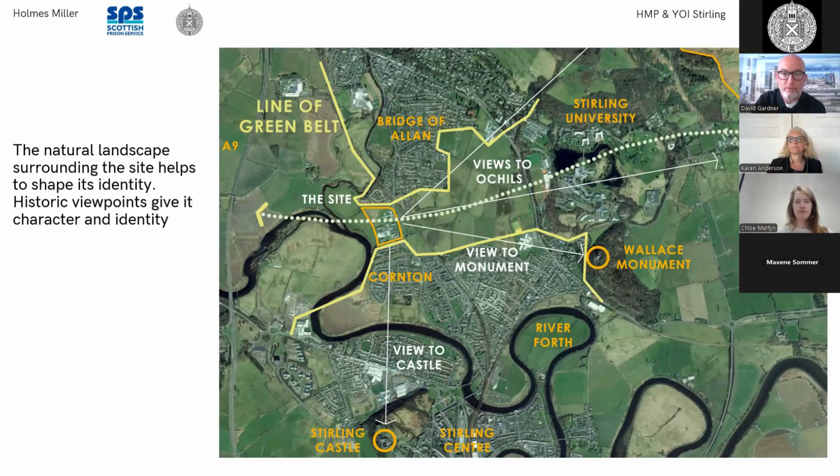I won't dwell on this slide. Everybody knows where Stirling is, in central Scotland, just north of Glasgow and Edinburgh. The site itself sits to the north of Stirling city centre, between Cornton and Bridge of Allan. It's a fantastic site with spectacular views to the surrounding natural and historic landscape. It sits in the middle of a green belt that runs west to east, which was a starting point for us in terms of how we tie the scheme into the natural landscape. You can see how fantastic the natural and historic environment is from that photograph.

The existing prison, built predominantly in the 60s although it grew over time, is a collection of fairly institutional corridor-based wings of accommodation. Fairly uninspiring, I would say. When you were on the site, you had no real sense of an overall master plan, no sense of being in such a fantastic context. The existing prison buildings were fairly, I guess, not fit for purpose. They were institutional and a little bit dead on their feet, with no joy, character, or purpose to them.

Have I lost the screen? No, I've lost my PowerPoint. No, we can still see it. Hold on. Sorry, apologies for this, I've just got a blank RIAS logo in the middle now. We can currently still see all your slides, like in a row. Okay, right, okay, I think I'm back now.

Sorry about that. So this report looked at both the statistics around the women in Cornton Vale and also the inadequate quality of Cornton Vale, which I mentioned was not fit for purpose. Things like high levels of self-harm and a lack of constructive and meaningful activity were influenced by the design of the existing establishment. A set of recommendations came out of that report, the main one being that Cornton Vale should be replaced with a purpose-built, trauma-informed new establishment very much focused on female offenders, so it was gender specific in that regard.

This is where SPS and Ian Smith came in quite heavily at a very early stage. There were a lot of exercises involving the user groups, including the governor, deputy governor, and the management team within the existing Cornton Vale. It was a bit of a get-out-of-your-comfort-zone learning experience, trying to push some alternative thinking around what a prison should be.

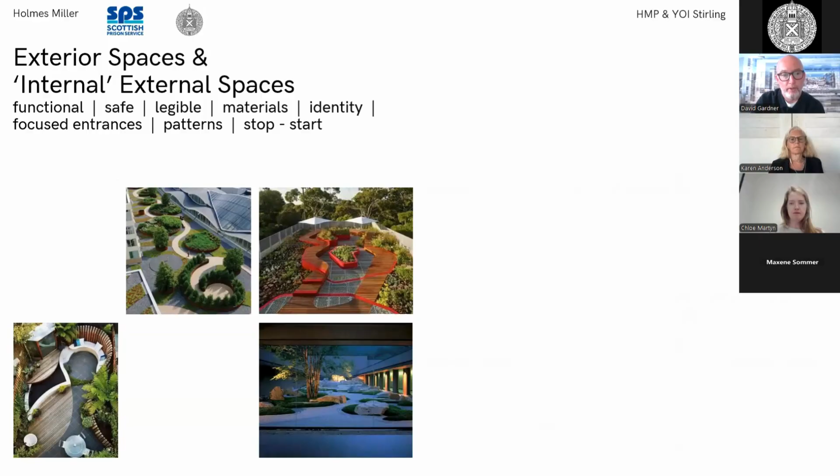And then again, just starting to think about how landscape can be woven into the overall concept as well, whether that's daylight, context, and external spaces and relationships from inside to outside spaces.

We didn't really look at any local or national exemplars because I think our strategy was that there really aren't any of any merit.

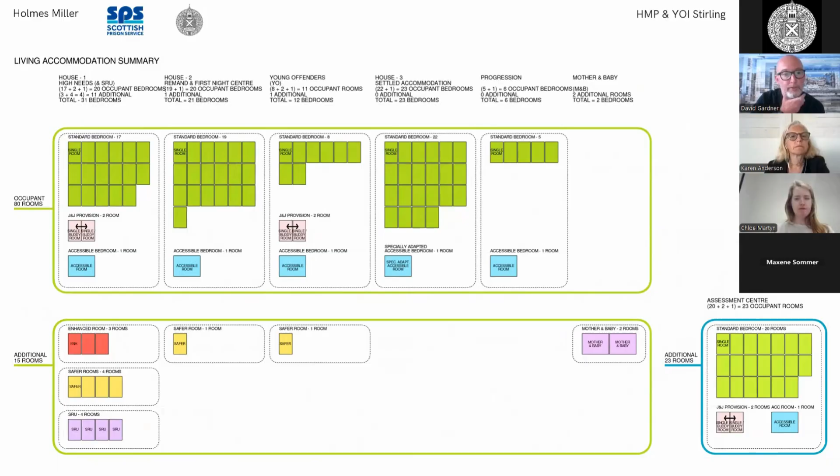So in terms of the design process, most projects start off with fairly complex schedules of accommodation. This was no different. We had a series of individual houses that had to accommodate a number of bedroom spaces, and these were all broken down into particular needs and requirements, whether that be remand or high needs or settled accommodation or young offenders. And there was also a requirement for an assessment centre, which was an additional house block.

So there's a bit of a strategy starting early on to try and understand the appropriate numbers of bedrooms to put within each community, to allow an understanding of what's the optimum number of women that should be socialising within an individual community.

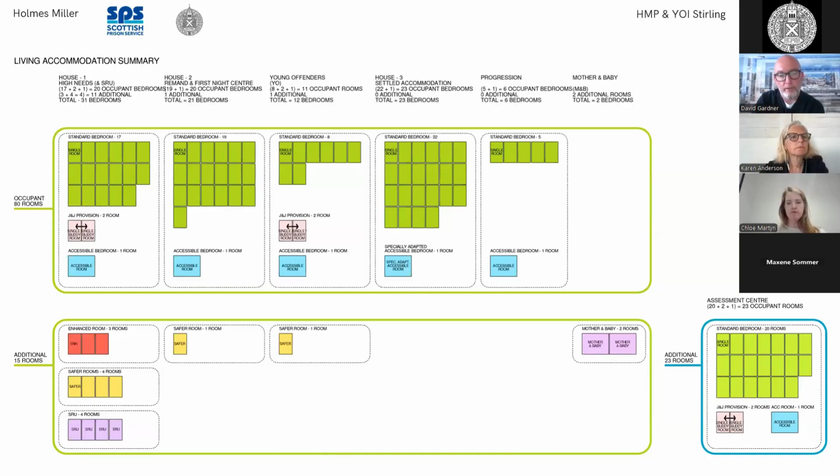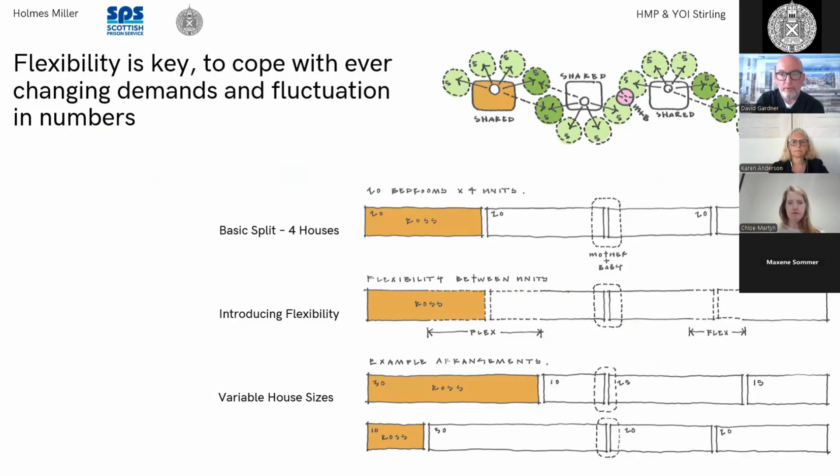That then led on to some abstract diagrams around flexibility - trying to create house designs that allow an element of flex, so that if particular types of accommodation require higher numbers, there can be a flexibility between the spaces to expand and contract from one wing to another. And then we started to look at different types of arrangements of bedrooms, with a particular focus on how they relate to landscape spaces.

So obviously there you can see we started to look at courtyards. We looked at radial blocks and folded blocks and how they relate to circulation spaces and obviously to the landscape itself.

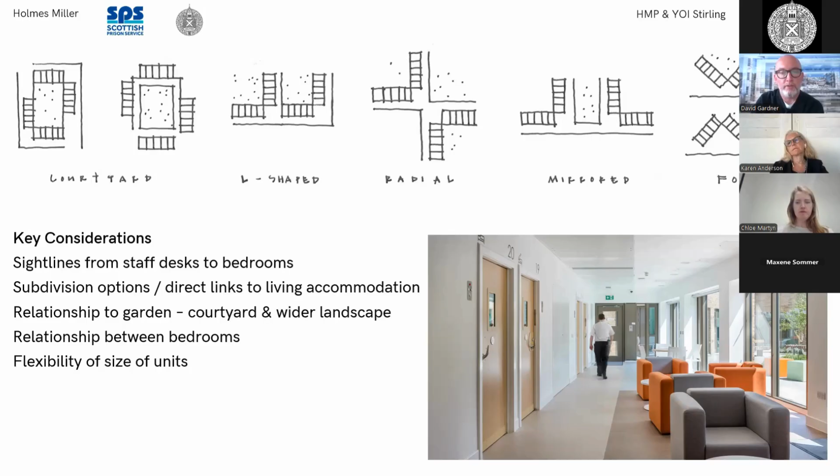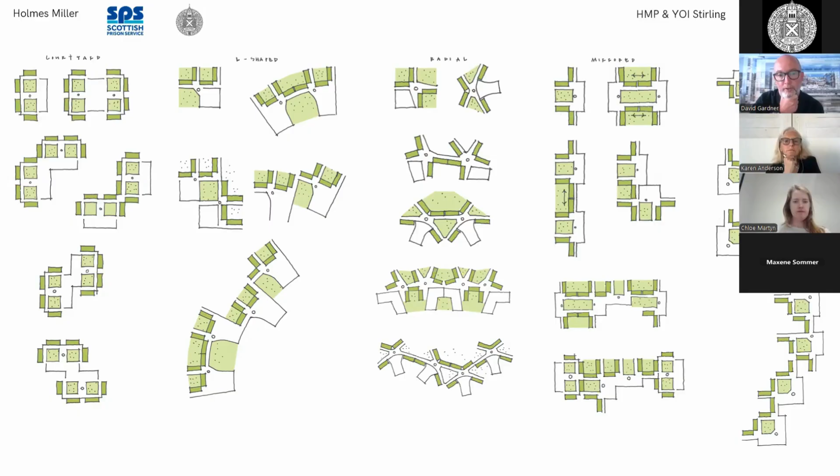And then we looked at these an awful lot. This is just a snapshot of some of the diagrams that we pulled together just to try and understand how these sets of accommodation could be assembled into an overall strategy for the house wings themselves.

At the same time, all of the other accommodation on the site - this is an exercise that we traditionally go through with SPS around adjacencies. There's quite significant functional and operational requirements that have to be considered at the same time. So we strip these back down into bubble diagrams just to ensure that we get all the adjacencies correct and the security separation correct, but without trying to influence them into the shape of a building too much.

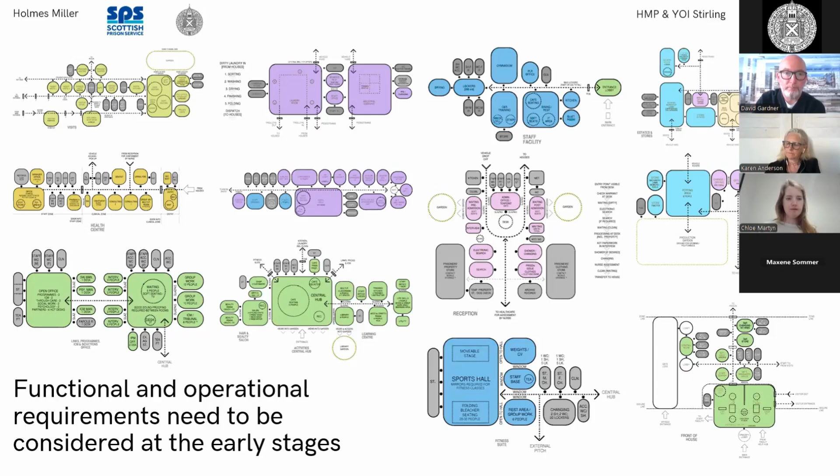At this point, we started again to think about context and particularly the natural environment. With SPS, we came up with the idea that the site is very much part of a kind of landscape flow, going from the Ochils down into the Forth Valley and through the site over the River Forth and westward. So with our landscape architect, we started to look at how that journey can be experienced through a series of different types of landscape spaces. We can talk you through those in more detail as we go through the slides.

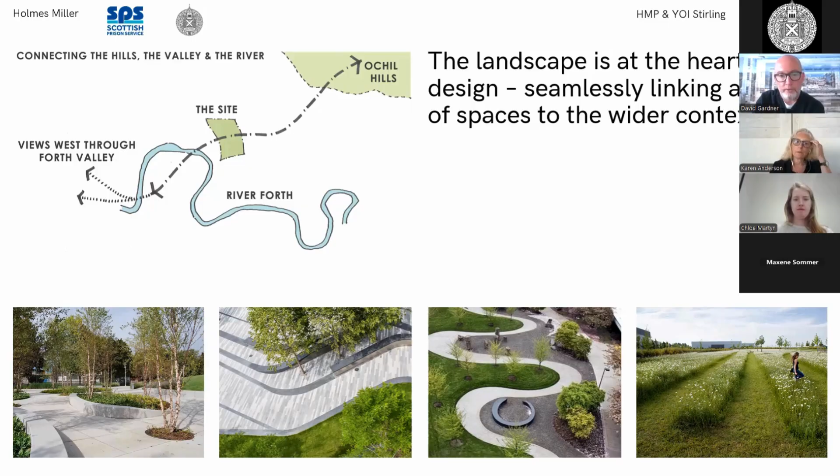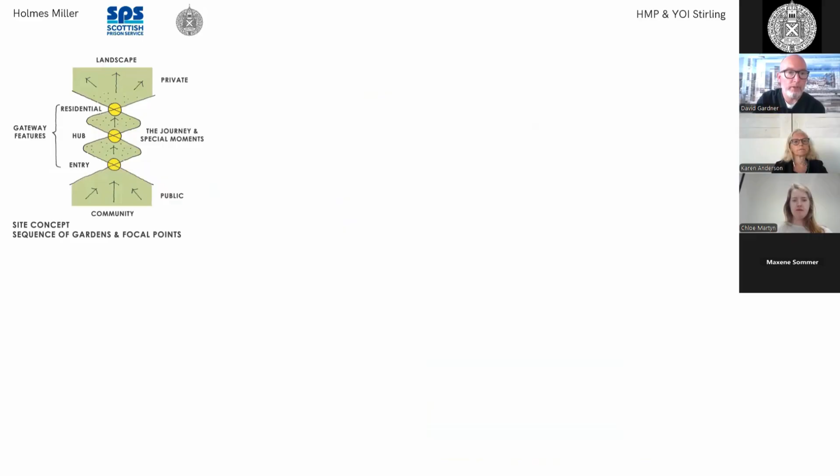So this idea where we've effectively got a flow through the site, from a community or public front-of-house side through to a private side with the bedrooms looking out into the landscape beyond to the west. We started to look at how that manifests itself on the site, east being the public side and west being the private side.

At that point, there was a decision made that all of the house buildings should be single story, single aspect, to allow an equality of experience for all of the bedrooms looking out to the west into the landscape. Then we started to drive these ideas of different character landscape zones that worked their way through the site, so you've got this kind of flow between public, semi-private and private going from east to west.

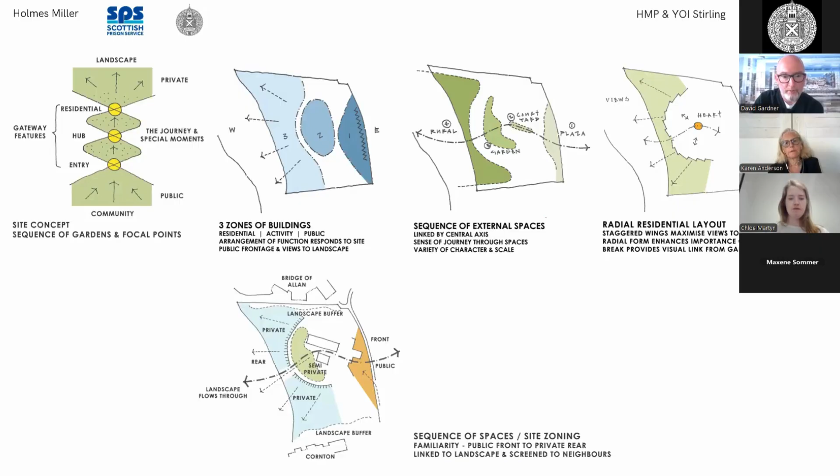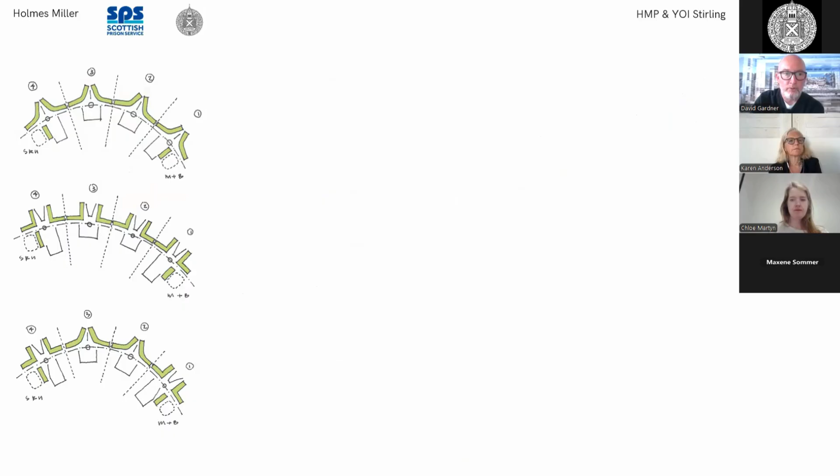So we started at that point to settle on the kind of radial form of the bedroom accommodation, still looking at lots of examples of different types of wings. Then we settled on an arrangement where we had a series of staggered, subdivided wings of bedrooms that created triangles of accommodation, which formed a kind of array around the site.

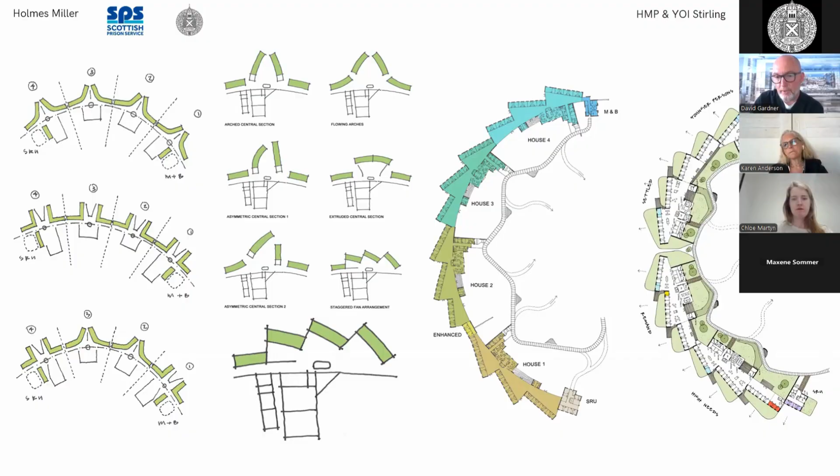What that allowed us to do was effectively angle the bedrooms towards the west, which maximised the number of bedrooms that faced west as we possibly could. That's evident from the final concept drawing, where you see we're opening these wings up as we go round. And that's an aerial photograph of the finished scheme, which again shows how that works with the wings open, broken, allowing natural light into the spaces internally.

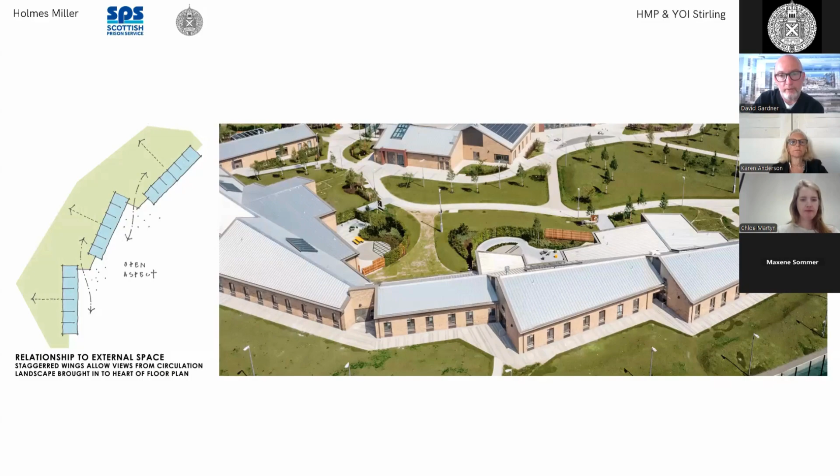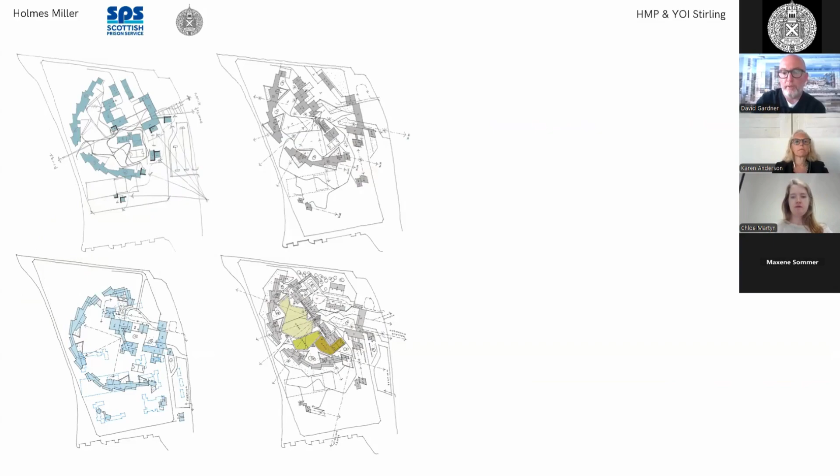At the same time, we went through a significant number of site arrangements. One of the difficulties we faced was that we had to maintain the existing Cornton Vale prison on site, to the south of the diagrams you see there. It was shrunken in size, but it still posed particular challenges. All of that in line with trying to create a master plan that picked up as much as possible from its context.

So trying to create an axis through the centre of the site which picked up on the Wallace Monument, trying to maximise views from accommodation towards the castle, and obviously trying to create the bedroom views out to the Forth Valley. That started to cement the idea of the character courtyard garden zones that wind their way through the centre of the site.

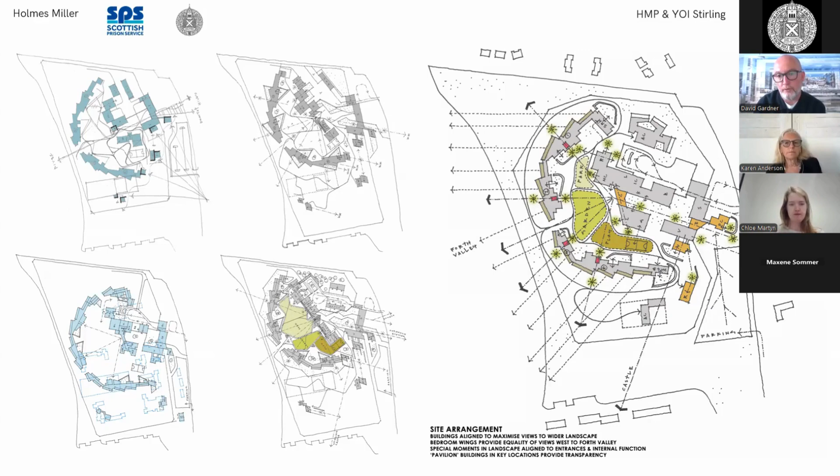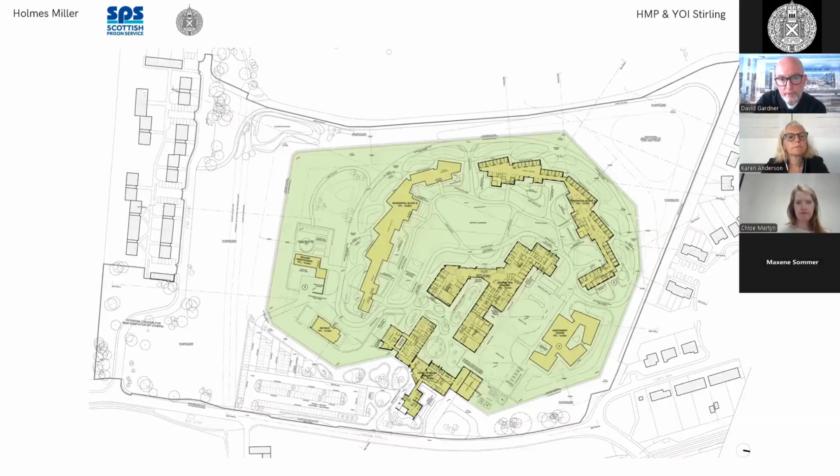This starts to touch on the second concept, which was one of transparency through the site. This is just a site layout that shows you the same arrangement.

The idea with the transparency is that this concept started off with just one of the buildings on site, the prisoner reception building, where the women will come from courts. Traditionally, prisoners arrive via secure vans and are taken into fairly solid, austere buildings and don't see daylight for probably a couple of hours going through search processes, and it's an incredibly stressful, traumatising experience.

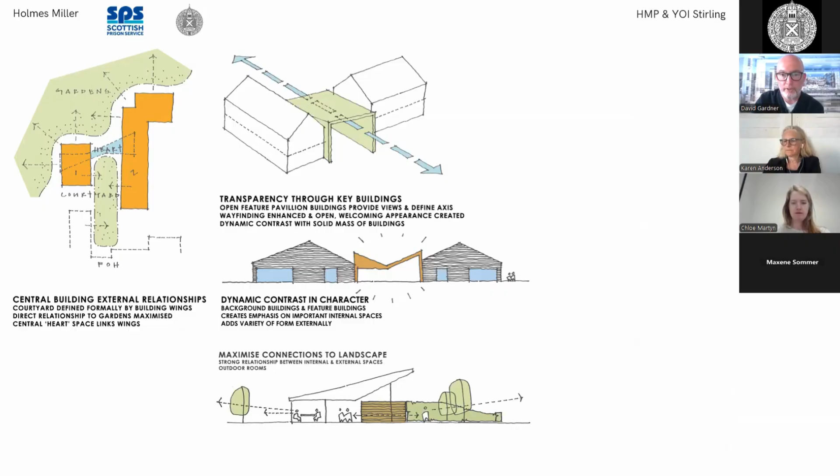The idea we tried to focus on was to create a very open experience, whereby every entrance that you went through into any building, you could simply see straight through it into the gardens. You could see the buildings beyond, so there was that transparency visually, but also an understanding of what the process is and where you're going to go. That was a de-stressing environment we tried to create. You can see again the same image, trying to create that axis so you can see straight through the site.

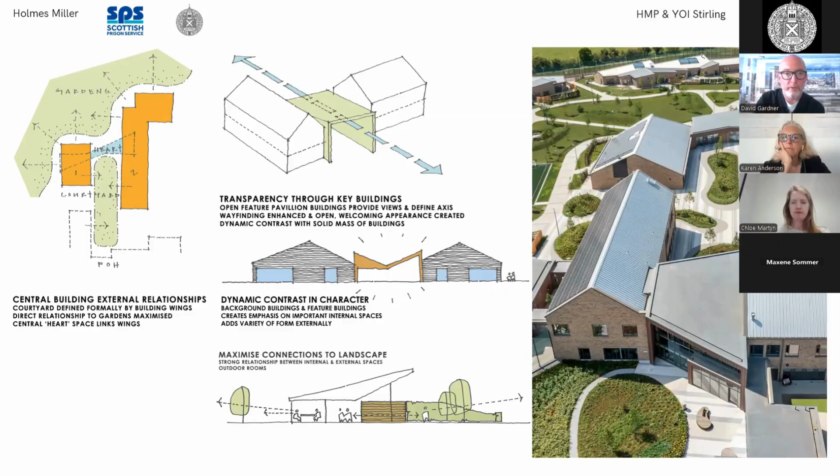This is the reception building that the women are brought into. So very light, very airy, very open, with views through to the landscape and the houses beyond. So when they arrive, they know what is in store, where they're going, what direction, and they can see the landscape beyond - that's a positive aspect.

That's just another couple of views from the same space. Traditionally, these are very, very internalized environments, full of holding rooms and search facilities with no views to the external.

As I say, what we tried to do beyond that was extend that strategy through every single building on site, whether it be the entrance pavilion you see at the top there, or even as you approach through the entry points to each of the house blocks - you can see straight through to the landscape beyond.

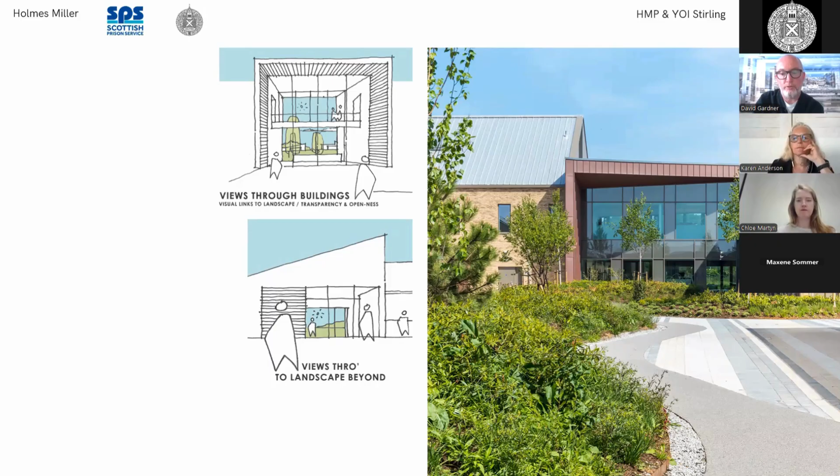This is a view from the main entrance reception. Visitors will come into this building, and again you can see straight through to the environment within the central courtyard and beyond.

Traditionally these are very enclosed institutional corridors, but what we tried to do here was create almost a separate pavilion for the visits hall, with a little garden space that both the visitors and the women in custody can access through.

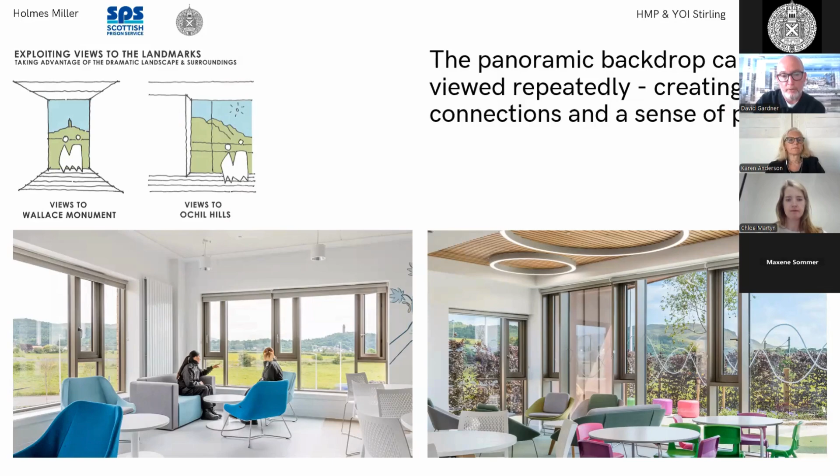Again, trying to pick up as much as possible on contextual views, whether historic monuments in the landscape or the natural environment itself, trying to create a sense of place and a sense of pride in the context.

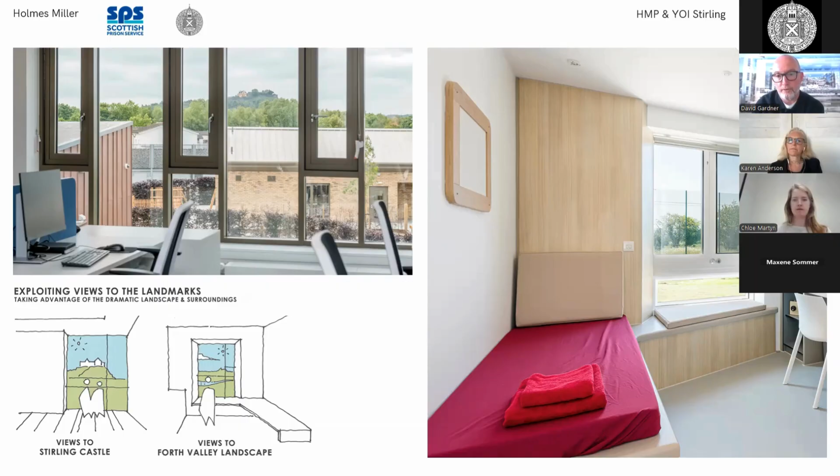I think this has been a very successful part of the project, particularly when you contrast it to the previous establishment, which was incredibly austere.

Just something as simple as putting a green coating on the secure perimeter fence really creates a different visual appearance. And the wildflower area you see there is actually within the site boundary, so it's a managed garden space outside the perimeter as well, which is quite a fantastic view through.

So coupled with the transparency strategy was making sure we had high levels of natural light and glazing, particularly around courtyard spaces. Too often courtyards, whilst well purposed, can lack a strong relationship to internal spaces, so the idea was to really maximise the amount of glazing around courtyard spaces.

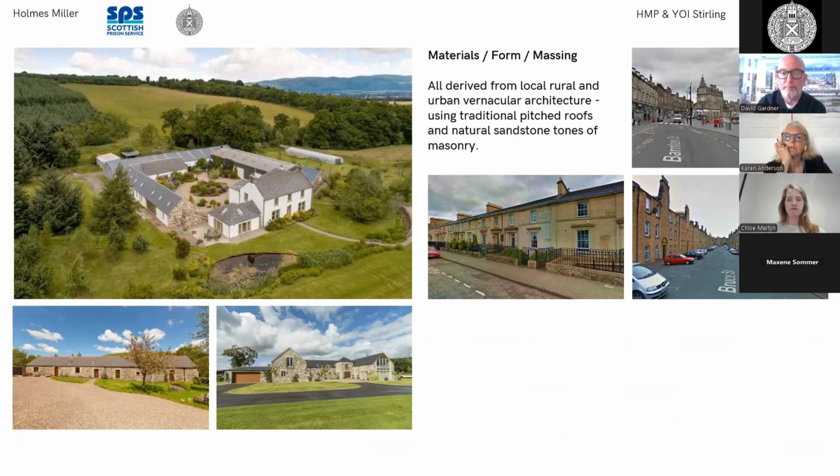In terms of materials, we tried to pick up on contextual cues around the local historic vernacular, with courtyard, single-storey farmsteads, trying to create a pitched roof rationale, and tying in material colours with the sandstone colour prevalent throughout Stirling.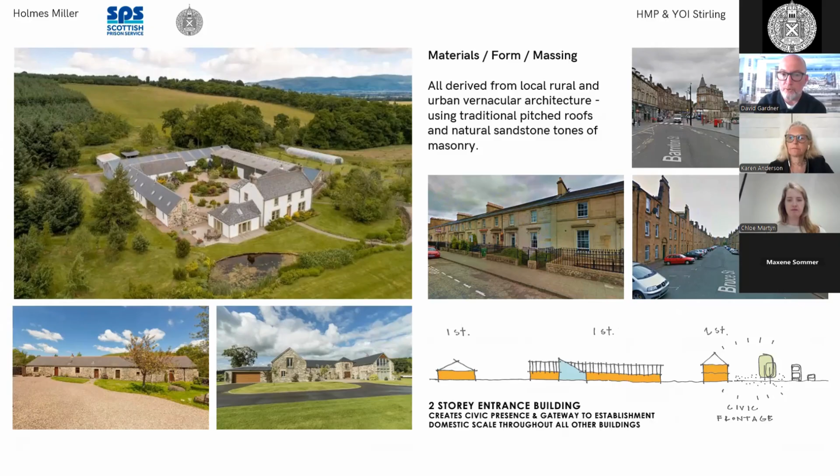That's a diagrammatic section of how we've used the massing of the front of house building, a two-storey element, to create a little bit of civic presence, and then a human scale throughout the rest of the site, which creates a hierarchy.

These are some views of the finished courtyard areas, showing the facing brick that ties in with the sandstone colours around the area, and a series of pitched roof buildings which pick up on the local character.

Some smaller views to the landscape. This shows the visit hall pavilion, which is metal clad. The idea was that a number of these metal clad pavilions created a contrast to the solid brick, and these pavilions would be heavily glazed as you went around the site.

Where we did use precast concrete, we used it with graphics, and in this instance it was to visually screen the vehicle service zone beyond, but it creates a nice backdrop to the landscape gardens.

Internally, our colour strategy and graphic strategy were heavily focused on the links to the natural landscape, starting with a kind of green spine, but also looking at the seasons and how different plant species blossom throughout the year, and the different colour cycles created throughout the year. It was a slightly abstract approach, but it set up a background palette and an accent palette that we used throughout.

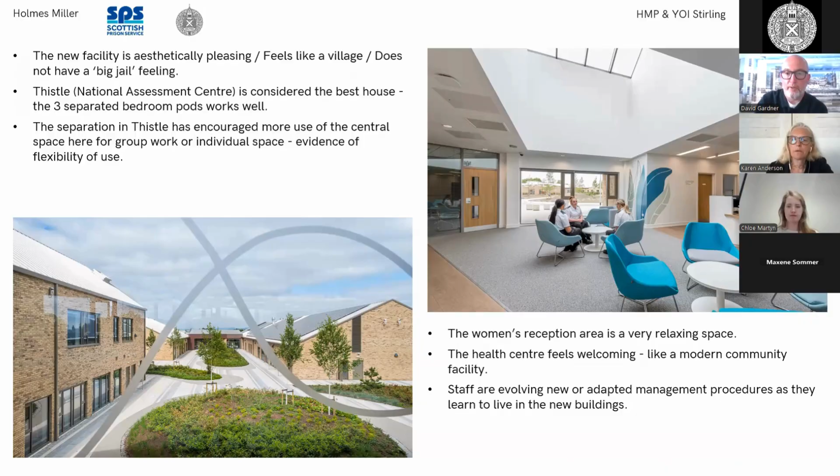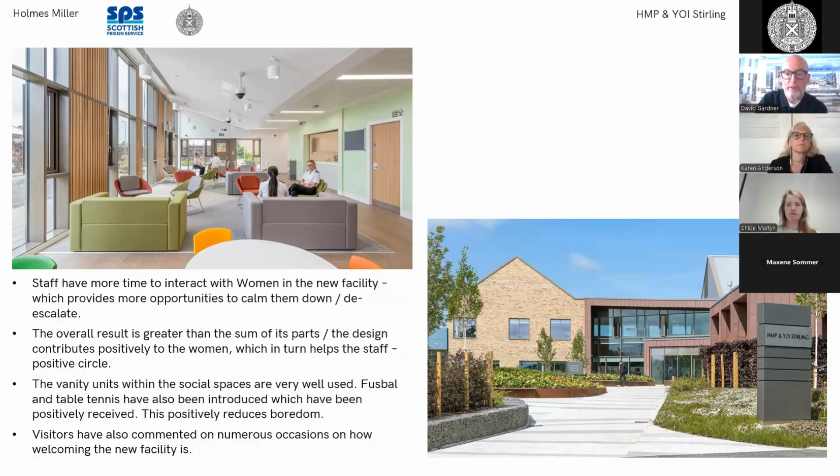These are some of the statements that came out of the post-occupancy evaluation we carried out. The overall process is still evolving, but you can see statements around how much more time staff have to interact with women in the new facility, and even down to small things like how vanity units are used, and how spaces are subdivided so people can either be in groups or retreat into more personal spaces as they feel.

You can see women on arrival have a very positive initial reaction to the reception spaces. So it's been a very worthwhile process to go through in terms of understanding how the staff and the women have benefited from this new environment.

Just on the final slide here, this was just an anecdote. There was a media company that came in to make a production on the new women's estate, and there was a particular woman in custody who I think was quite overwhelmed by how different the new establishment was, and that she was able to actually meaningfully reintegrate with other people in the new establishment. So it's things like that you hear that make the whole thing worthwhile.

Yes, absolutely. There's a more pragmatic question: can you talk us through the plans? I'll just share my screen again. Okay, so the buildings on site - I don't know if you can see my cursor here.

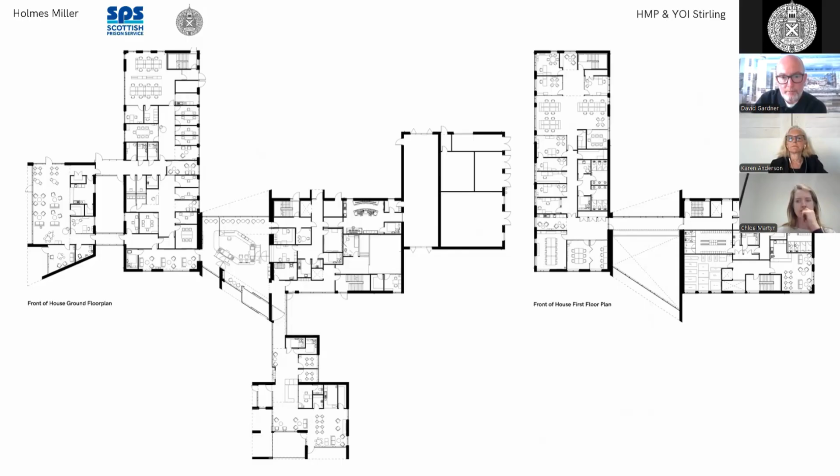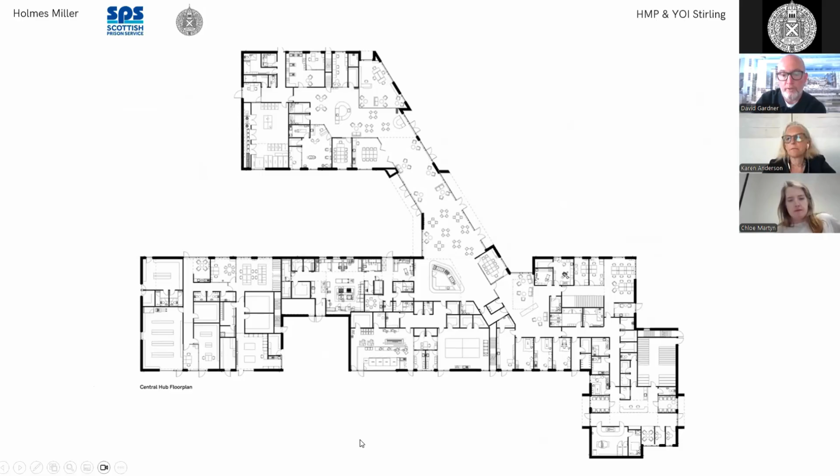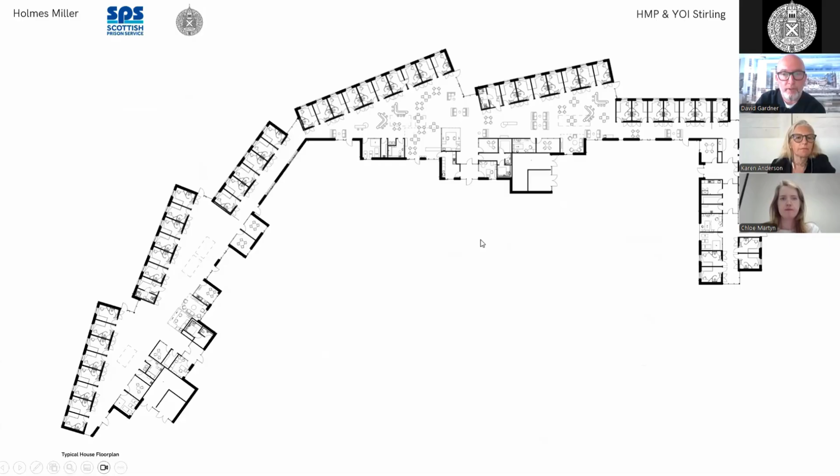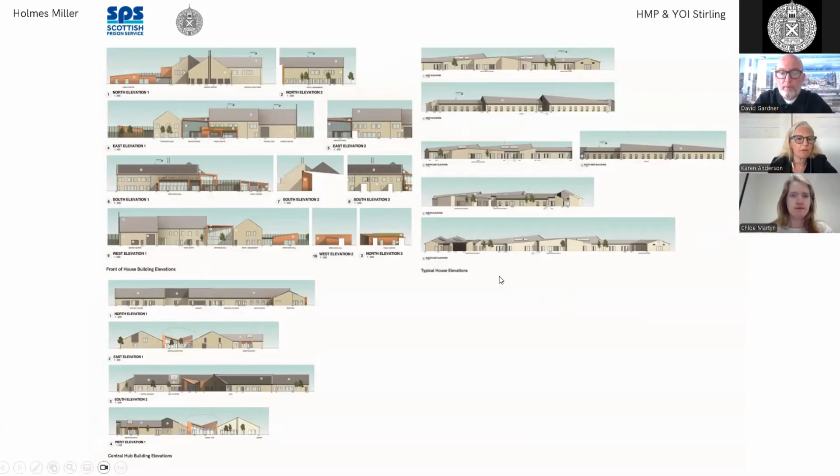Thank you, I've got lots of questions for you now, David. The first one is: you've spoken about how you've been challenging a traditional prison design brief, working with SPS to reframe their thinking. From your perspective, what was the most difficult institutional mindset that you had to get over? How did you push back against convention?

I guess generally, as you would expect, the security requirements and operational requirements in prisons are very extensive and robust. The whole approach to trying to get buy-in from the people that have to operationally manage the prison every day, who are used to a prison running in a certain way, that I think was always a challenge that kept rearing its head.

Trying to create a lot of openness within the design. I think the security standards that SPS had at the time, and I guess still have, were mainly focused around the design of an adult male establishment. But males in custody behave very, very differently to females in custody.

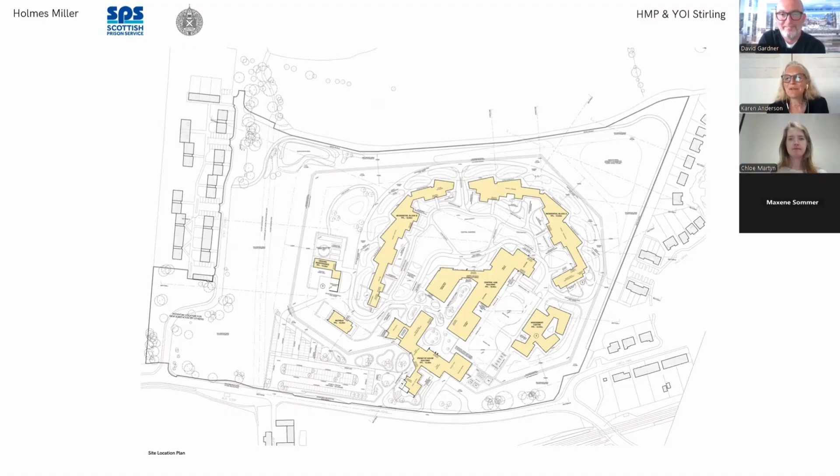I've got to say, in these days to increase biodiversity, we need to make sure we hang on to our landscape budgets, because in repurposing they could make such a difference. I'd like to thank you again, and thank Chloe for sponsoring this award, because I think there's no doubt it's the most innovative facility - not a prison, but very much hopefully something for the future for the rest of our estate to look to, and hopefully to build in some of the innovation and learn some of the lessons, hopefully through improved well-being and less self-harm of inmates. So thank you very much indeed.

There's one question that came in at the last minute, but I'll get you to answer it quickly. They talked about neurodivergency in the colour scheme - was that taken into account?

There was a degree of - not so much research, but we did explore colour psychology with the user groups at the time. Certain spaces were focused on being certain colours, whether to create calming environments or more stimulating environments. As you'd expect, it's quite subjective to a certain degree, but some of the psychology does seem well rooted.

I think the way the graphics work helped to soften that a little bit more, and having that green spine through everything helps too. We didn't really want it to say 'oh, this is the red building, this is the blue building' - it's just trying to keep it really, really subtle.